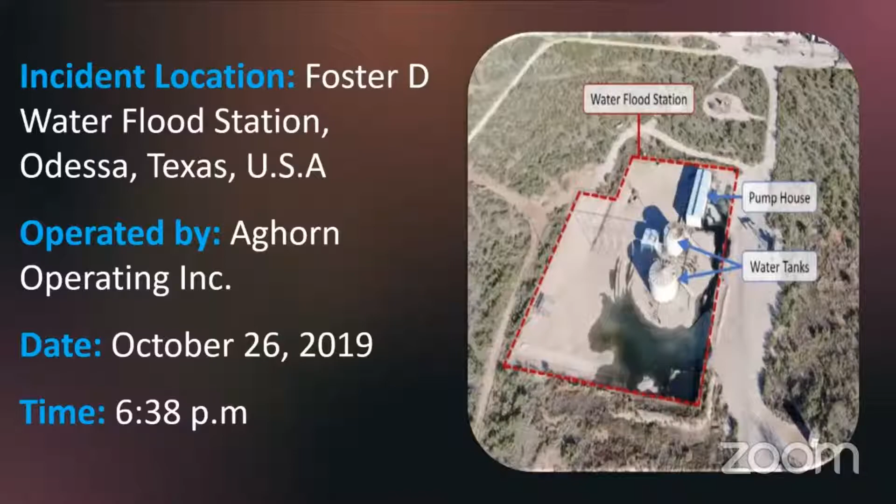So here you can see the incident location. It is operated by Aghorn Operating Incorporated. So on October 26, 2019, at the Aghorn Operating Incorporated Waterflood station near Odessa, Texas, one Aghorn employee succumbed to toxic hydrogen sulfide gas that had escaped through a damaged pump. His wife was also fatally injured by the hydrogen sulfide gas while searching for him at the facility after he didn't return home.

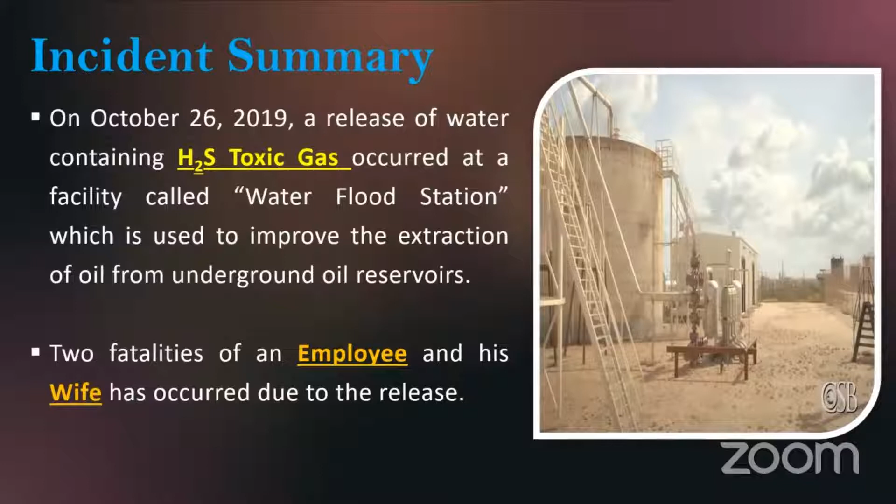So our review of this event is about the unfortunate loss of 2 lives, but the lessons from this incident affect the multitude of other oil and gas facilities throughout the country that handle this kind of toxic gas. This incident was both tragic and unnecessary, and we urge companies operating oil and gas facilities to understand the findings from this investigation and implement appropriate safeguards and trainings. And we need to work together to ensure that our workers and community members return home safely each and every day.

So before going to the incident summary, we will first understand the illustration of the Aghorn water flooding process. The Aghorn water flood station is used as part of a process to extract oil from underground reservoirs in West Texas. Basically there are 2 methods for extracting the oil from the formation. First is natural pressure. And the secondary method is injecting water through adjacent wells to create artificial pressure inside the formation.

So the oil extraction starts at an oil well where pump jacks, these artificial pumps, are used to lift oil from the underground reservoirs. The oil coming out from the ground has some water. This mixture of water and oil is sent to the tank batteries, where the water separates from the oil. A tank battery is a group of tanks connected to receive crude oil from the well. The oil is then transported for further processing,

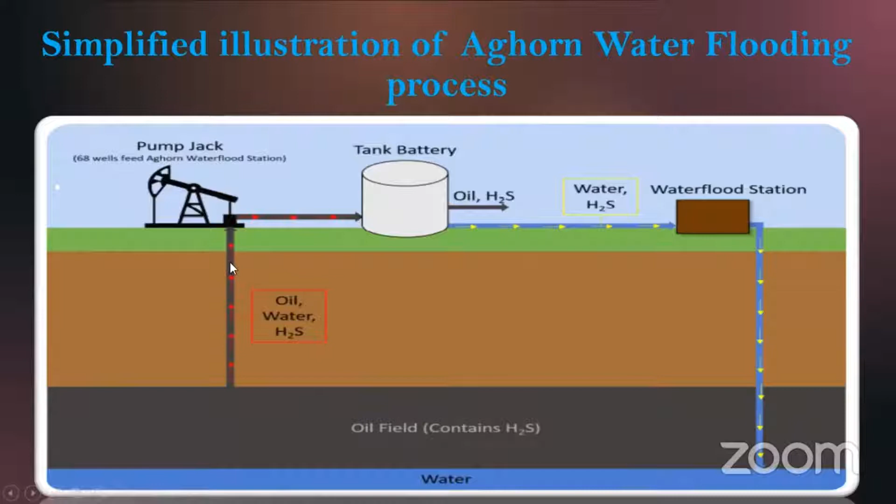At the time of the incident, there were two pumps in the pump house, pump number 1 and pump number 3. They had removed pump number 2 for maintenance. The pump house also contains a control room from which employees run the station, and typically the station is not continuously occupied.

Then the employee who is actually operating this pump house or this station, they call a pumper. His responsibility is that he has to visit twice per day to record meter readings and inspect equipment. If there is an equipment problem,

and the pumper is not at the station, the alarm system triggers an automated phone call to the pumper from this control room, and it is then the pumper's responsibility to acknowledge the alarm and go to the station to determine what is causing it.

The station was also equipped with a hydrogen sulfide detection system, and that would trigger a separate automated phone call to the pumper on duty if it detects dangerous levels of toxic gas. The system would also illuminate a rotating beacon light on top of the pump house. We can see here.

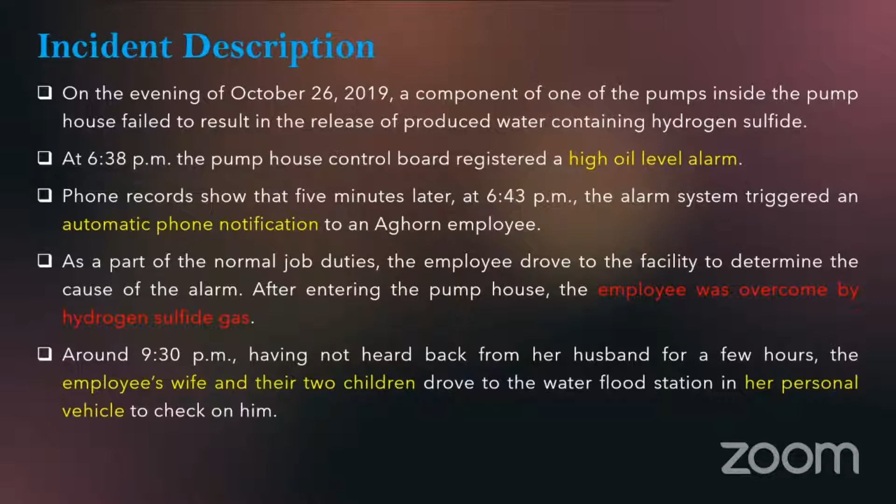After receiving this notification, the pumper came to the flood station. He parked his car near the water flood station, leaving his personal H2S monitor in his car. Then the pumper went into the control room, where the control system indicated the alarm was for pump number 1, which we saw earlier here.

Then the pumper prepared to work on pump number 1, a pump which could automatically start when enough water was available to pump to the injection wells, and it was still connected to its power source. The pumper did not de-energize pump number 1. He closed only the pump number 1 discharge valve, and partially closed the pump's intake valve.

While the pumper was near the pump, he was overcome because water was leaking from the plunger of that particular pump, and he was overcome by this hydrogen sulfide and fatally injured by this toxic gas.

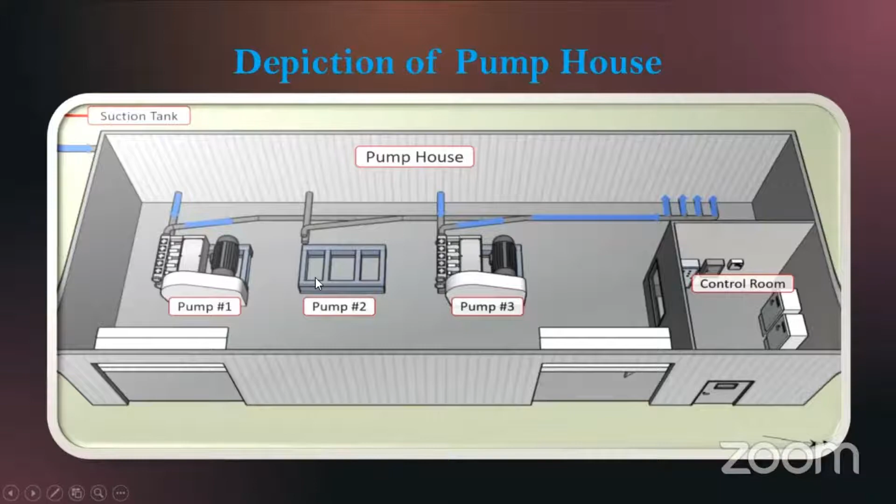After several hours, when he did not return home, his wife drove the car with his 2 children to the station to check on him, why he did not return. Then she entered the waterflood station facility and searched for him. She found him on the floor in the pump house.

Then she was also overcome, because she didn't have this kind of personal monitor and detection system either. She was also overcome by hydrogen sulfide and fatally injured by this hydrogen sulfide gas. A short time later, the emergency responders approached the pump house, and they detected a very strong smell of hydrogen sulfide.

This required them to set up a command post and use self-contained breathing apparatus. They found the pumper and his wife deceased inside the pump house, and water continuously spilling from pump number 1. Then the responders rescued the 2 children, who were inside his spouse's car.

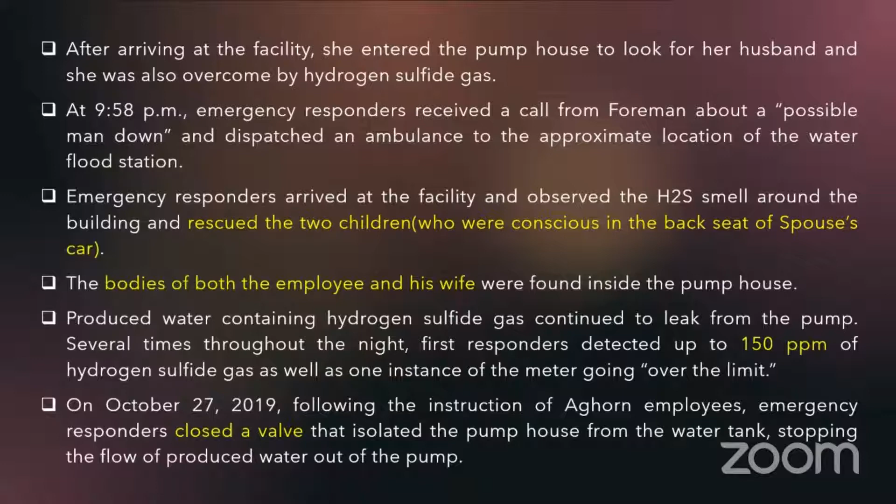After that, the CSB, the Chemical Safety and Hazard Investigation Board from the USA, analyzed these 6 issues pertaining to this incident. One is that the pumper was not equipped with his company-issued personal hydrogen sulfide detection device, H2S monitor, when he entered the pump house. On the night of the incident, he forgot his personal H2S monitor in his car.

The second issue they detected is that they didn't have written lockout and tagout procedures and policies, but relied on verbal procedures without formalized training on the night of the incident. And the pumper did not properly perform lockout tagout to de-energize the pump before performing work on it.

Instead, he started to close the pump's valves while the pump was still configured to be automatically operated by the control system. As a result, the control system automatically turned it on, and the water containing hydrogen sulfide escaped from the shattered plunger and continuously spilled out from that plunger.

The third issue they discovered is the confinement of H2S inside this pump house. There was no proper ventilation, inadequate, leading to a fatal concentration of hydrogen sulfide gas within that building. So this is also a major issue.

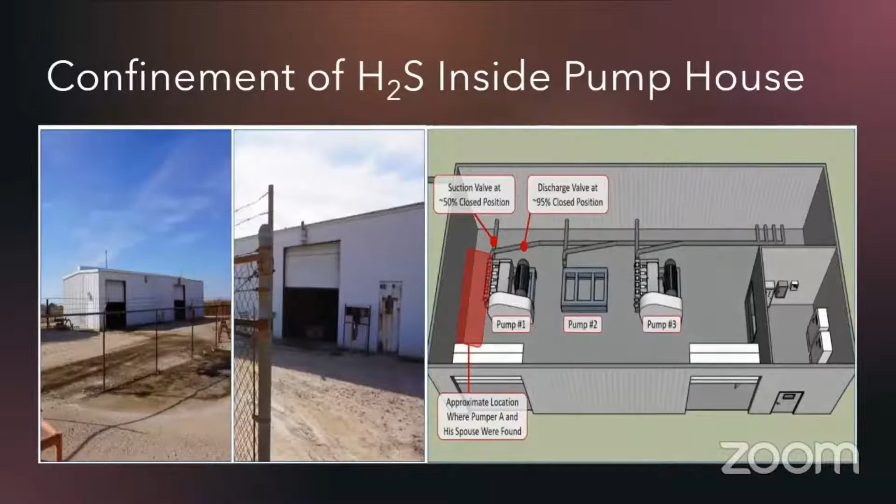The fourth issue they discovered is that there was a lack of a safety management system. For example, there was no risk assessment, no training, and there was no hazard identification program.

The fifth issue they discovered is the non-functioning of the hydrogen sulfide detection and alarm system. At the facility, some of the detectors were set to a testing mode, which prevented them from sending an alarm signal, and other sensors that were correctly set up were unable to send a signal to the control room. As a result, the pumper was not warned of the toxic hydrogen sulfide, either through a telephone alert or by illumination of the red pump house flashing beacon.

And finally, they discovered that there was a deficient site security problem. There was an informal policy that when an Aghorn employee is working at a facility, the exit gates are normally left unlocked. And on the night of the incident, this practice allowed the pumper's spouse to drive directly to the Waterflood station and enter the pump house, where she was also fatally injured.

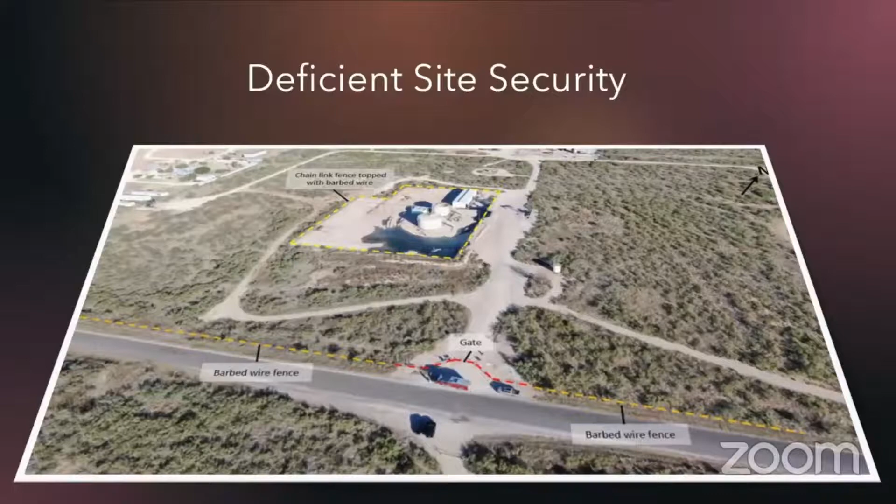Then, following the recommendations received from the CSB, there are some key lessons we learned from this incident. The employers, the organization, should take action to ensure workers always use the required safety equipment. They have to mandate the use of personal hydrogen sulfide detection whenever they are working in areas prone to hydrogen sulfide. Then they have to develop site-specific, formalized and comprehensive lockout and tagout procedures and policies.

The third is that they have to commission an independent and comprehensive analysis of each facility to examine ventilation and mitigation. And fourth is that they have to develop and demonstrate the use of a safety management program that focuses on protecting workers and non-employees from hydrogen sulfide. Then at facilities that handle toxic gases, gas detection and alarm systems must be adequately designed, maintained, and tested.

Then the last is that industrial facilities should ensure an effective site security system is in place to prevent non-employees from entering that particular facility. So these are the lessons learned we have to implement in our facility.

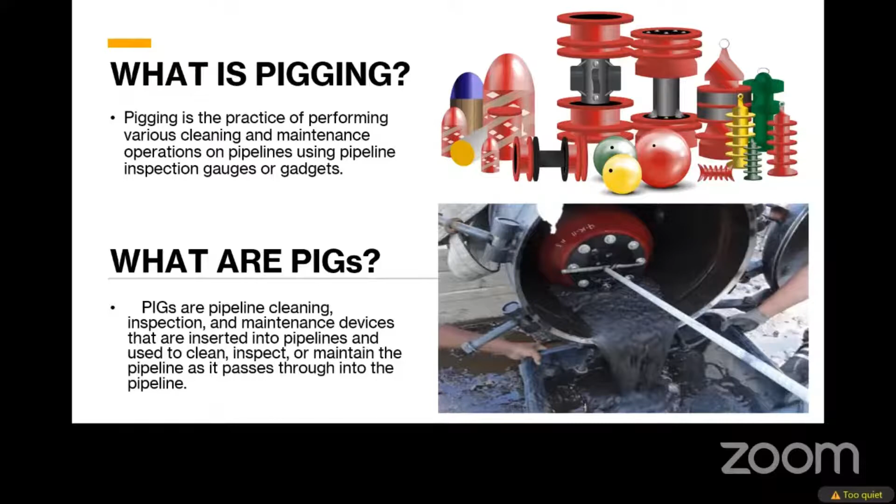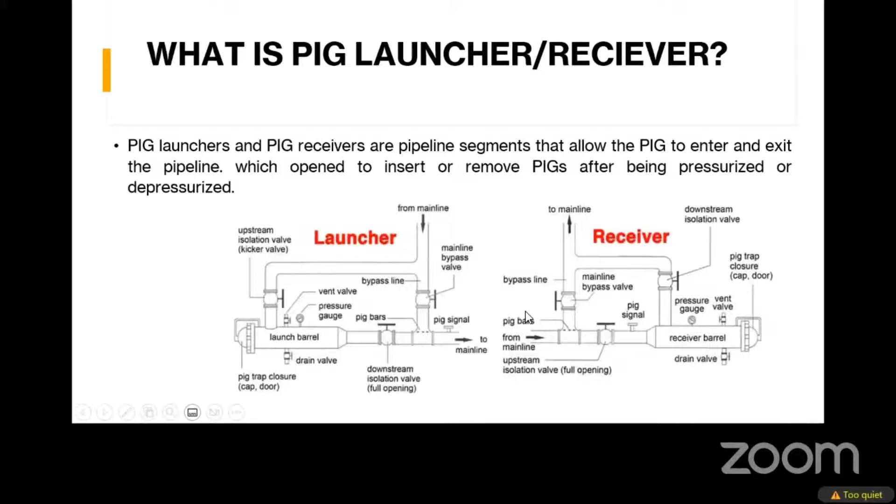Further, we move forward towards today's lesson learned. On June 25, 2012, at a production facility somewhere in North America, one of the global leading companies hired a contractor guaranteeing a safe pigging operation. During preparation for pipeline inspection using a pigging operation, a temporary pig launcher attached to a pipeline was overpressurized and failed. This incident caused one fatality and the hospitalization of 2 individuals. See here.

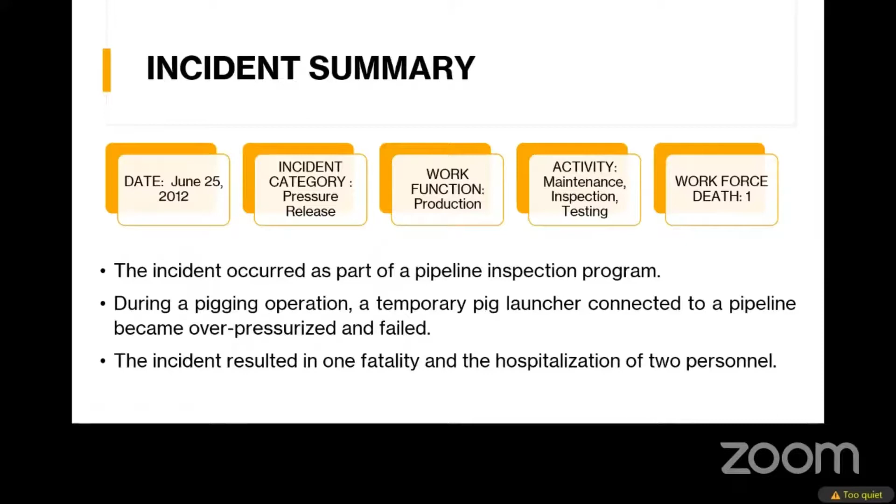The trap valve between the pig launcher and the pipeline had mistakenly been left closed, and the experienced inline inspection team assumed that the pipeline valves were in the proper position and started purging the line with nitrogen from a nitrogen truck. When the initial pressure was applied, the pressure gauge on the pig launcher apparently read 0. So it seemed to urge the team to apply more pressure on the pig. They felt the pressure wasn't applied and increased pressure. It was believed that the gauge overranged within seconds of starting pumping, and when the gauge needle was pushed up against the 0 stop, it appeared to show 0 pressure.

Within minutes, the temporary pig launcher was pressured beyond its mechanical burst pressure. Because the temporary pig launcher had no pressure relief device, it was finally pressurized beyond its burst pressure, resulting in an explosion. So incidents never ask to happen. They happen as a result of single mistakes, and when we look at process safety, they are disastrous. Many lives were lost due to some minor errors and decisions.

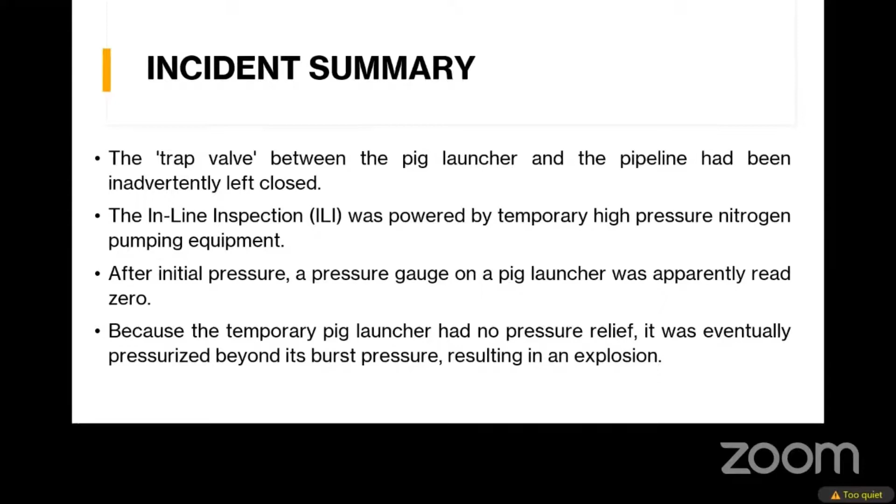So what was the root cause actually? Let's move. If we can't use the proper equipment at the proper place, it could be a disaster. We have to make sure before doing any test on a pipe. First, the pumping equipment was capable of delivering pressure far in excess of the design pressure of the launcher. And second, the risk associated with high pressure to low pressure had not been fully recognized by the team.

Eventually, there was no pressure relief valve on the temporary pig launcher. It was also observed during the design stage that they did not consider the temporary pigging operation. We all know the importance of HAZOP, but they did not specify the temporary pig launcher during the HAZOP, nor the technique involving mitigating hazards and implementing precautions by a knowledgeable and professional team.

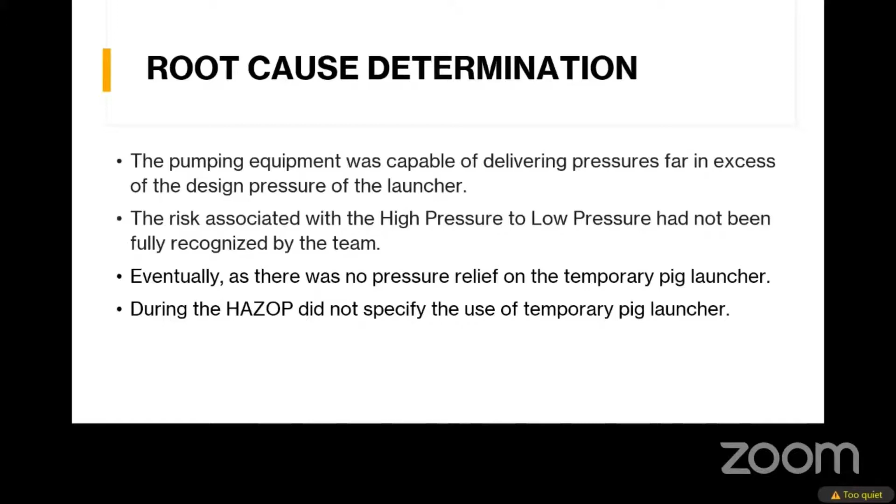So the operator increased the pressure, and when the pressure gauge did not deflect, this means the competency of the working crew was not verified and assessed. They increased the pressure and did not observe or inform the work crew why the pressure gauge was not working.

It looks like the procedure did not specify the need of a pressure relief device. It's like a man planning to cook some sweet food but without a sufficient recipe - it would become something different.

There was also no thorough risk assessment available, and clear risk control was not defined. The pressure safety device was not calibrated and maintained, there was inadequate training to the working crews, and an improper method statement was present at the work site.

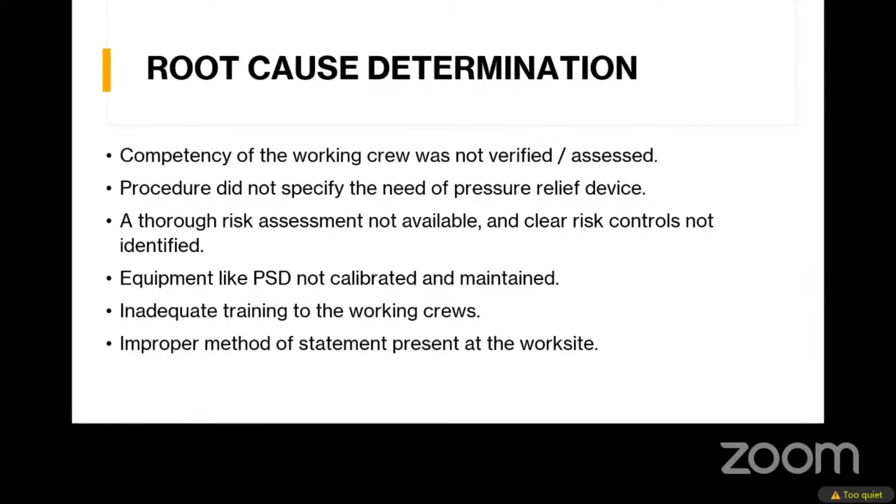So what was the lesson learned?

The design of the temporary pig launcher and the PSD shall be verified by an engineering team and approved by a third-party inspection company. Like a safety valve, relief valve, safety, temperature and pressure devices - everything should first be inspected by the approved company and calibrated.

A pressure safety device must be calibrated on a regular basis. A thorough risk assessment must be carried out and clear risk control must be identified. Risk assessments are very important as they form an integral part of the process operation.

Individual worker behavior is critical, and during the design phase, all activities must be clearly defined and stated in the HAZOP. Only competent workers shall be assigned to carry out the task.

This means individual worker behavior is critical for any organization's health and safety management system. If one worker behaves in an ideal, safe manner but the other worker does not, it means the other worker is endangered despite the one safe person.

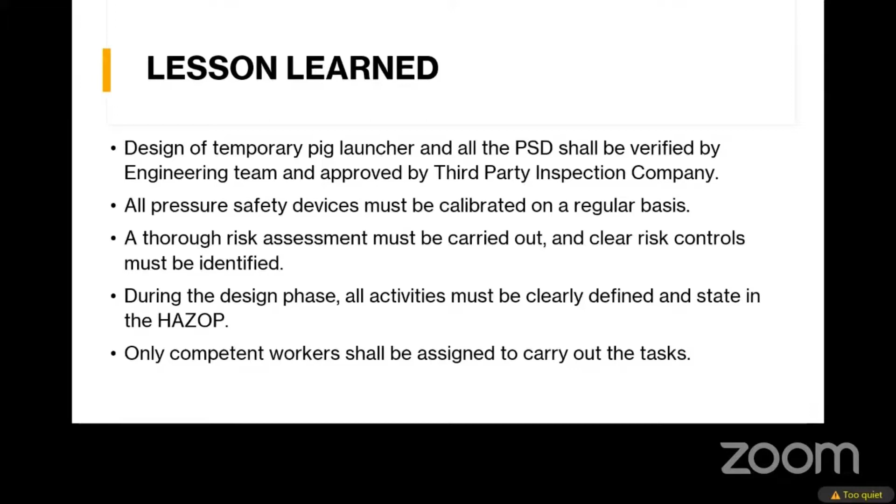The competency of the contractor and its personnel should be verified prior to the start of work. Procedures always need to be reviewed and updated accordingly by safety experts.

Let's look at the factors of process safety. We all know the difference between process safety and personal safety - accidents involving personal safety tend to occur very frequently but often have little consequence. Conversely, process safety incidents occur infrequently but can often have catastrophic results when things go wrong. We take all precautionary measures and strict guidelines, but mistakes still happen in the process, like rapid overpressure events, gas leaks, explosions, or release of highly toxic or energetic material.

The first factor was contractor management. We should always consider the contractor before selecting any contractor - we should check and review the risk assessment and all items like accident and incident history, policy, and everything. In this incident, they didn't assess the contractor before hiring them to start the pigging operation.

Also, we have to check the mechanical integrity. Mechanical integrity is one of the 14 elements of OSHA's program, and it's very crucial. They did not assess the equipment, did not calibrate any equipment, and just ignored it during the pigging operations - they did not follow the procedure. So mechanical integrity should be proper.

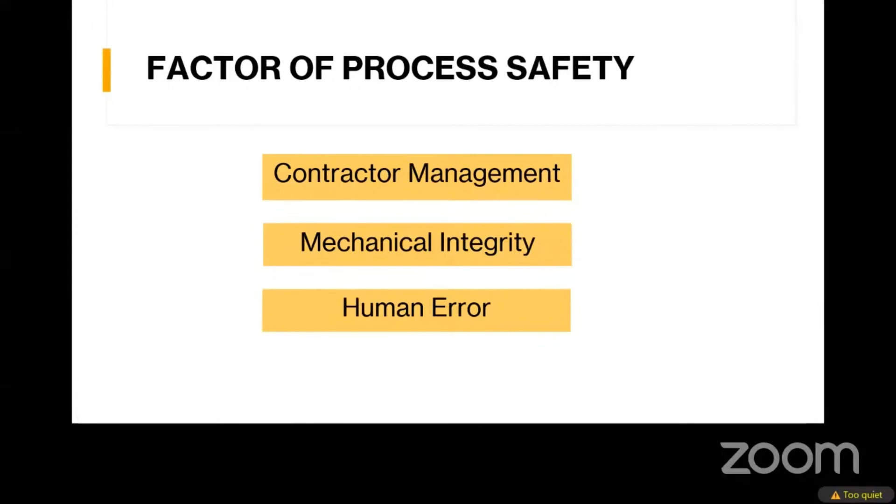I would like to conclude this. Thank you.